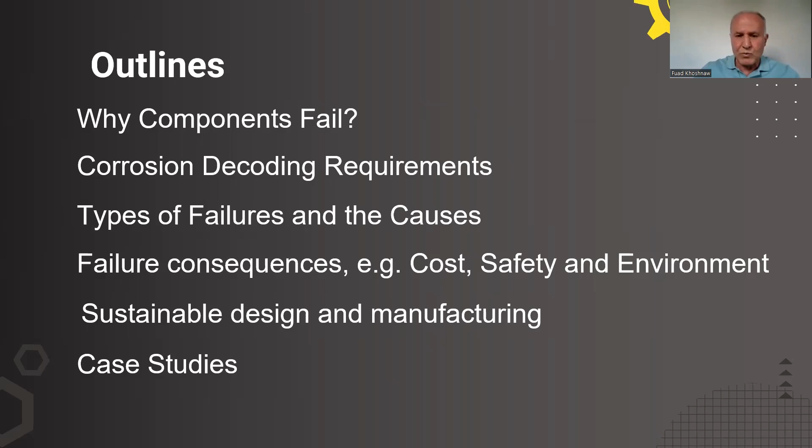Okay, so why do components fail? Any idea why do components fail? Maybe you should come here and speak. Improper design. Yeah. Material selection. Yeah, very good. Yes. Operation conditions is mentioned here. Yes, very good. All correct.

Yeah, that's good. So what you said, all correct. In simple way, if you try to give a first step to know why components fail, in any application for any material, there is something called applied, and on the other side there is a strength of that material or that system.

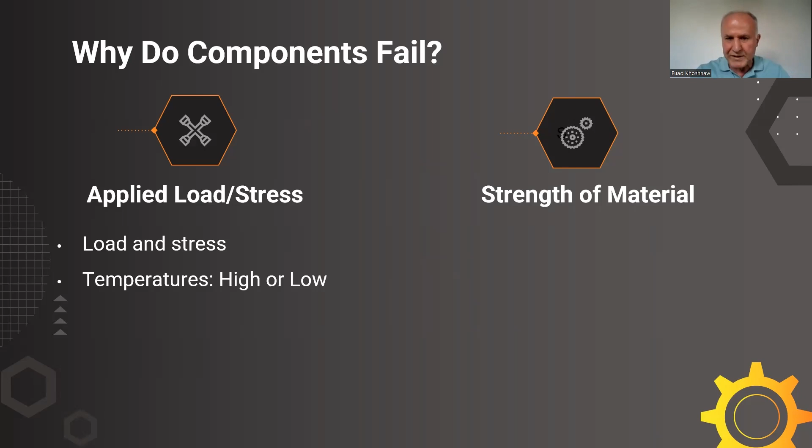This can be anything about applied, not necessarily only load, can be different things. The load doesn't mean mechanical force, it can be any other external action coming, including load or stress. So it can be applied load or stress, can be temperature, high or low. So it's not only about high temperature, low temperature also, sometimes when it is very low, causes some problems.

I will give an example about this later. Environment, when it is aggressive environment with high concentration or radiation - so all these are somehow actions will be applied on the material. And when it is out of the limit that the material can resist, then that's one of the main reasons why the components fail.

Of course, operational material selection, all coming through this as well, as we said. But on the other hand, there is a strength of that material. And when we say strength, it can be strength like yield strength, fatigue strength, creep strength, etc. All these mechanical strengths, and also toughness.

Toughness is a measurement for impact or for crack propagation in fatigue. Hardness, when the material is soft and is in contact with another material, then there is no enough strength of that. And then corrosion also - corrosion has also some measurement, which material has high corrosion resistance.

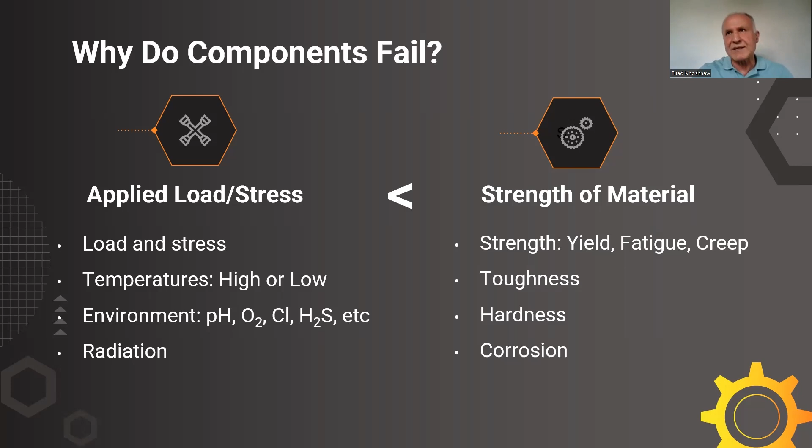So let's agree on that in the very simple way. Why components fail? Because the strength of that material that is used, any type of strength in general, is lower than the applied stress or the applied actions, let's say. Okay, now with this definition, the statement about why components fail, we can somehow say what are the types of failures and the causes behind.

That's slowly we go in deep and deeper with the slides. So for those that are not very much familiar with some mechanical failures or tests, when we say fatigue, that means cyclic stress. So it is not static, it is cyclic. And cyclic, we mean the applied stress, the amount, the magnitude or direction, or both, changing with time.

So sometimes in tension, sometimes in compression, with time changing. And the amount, the magnitude of the stress is also changing with time. If that's the case, then this component is subject to fatigue. But the question is whether it will fail or not.

We go back to the previous slide. Is the fatigue strength of the material higher than the applied stress? If it is higher, then most likely it will not fail, or at least it will last as expected for the lifetime of the material.

Creep or oxidation - creep is another type of mechanical failure. When there is a stress, so stress means there is a mechanical force on it, with high temperature, that's creep. But for oxidation, it doesn't need to be under stress, it can be just only temperature. And when we say high temperature, it is somehow related to the melting point of the material.

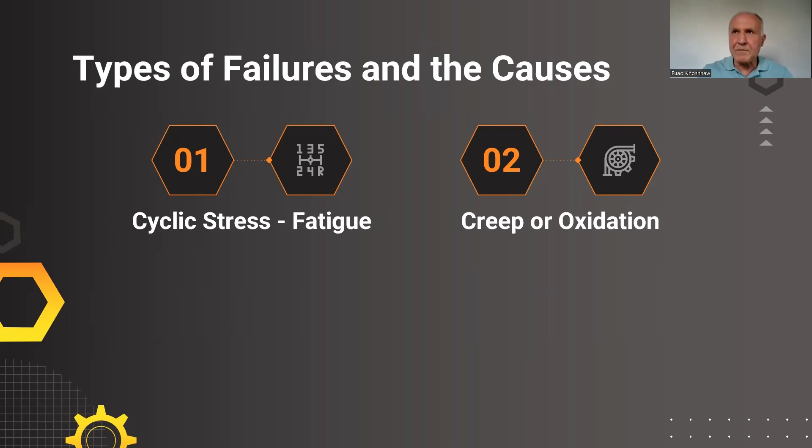And in general, it is not a fixed term, but in general, if the applied temperature with stress is around 0.5, half of the melting point, then at that time we need to consider the creep failure. So if the material has a melting point, let's say 1000 degrees centigrade, then 400, 500 is high temperature.

Corrosion fatigue happens when there is fatigue and corrosion together. This is a type of stress corrosion. Stress corrosion occurs with static load, when the stress is static for a long time, not changing in magnitude, value, or direction. If it is changing, that's corrosion fatigue. But if it's not changing that often, then it's stress corrosion cracking. So it's a combination of corrosion and stress.

Sometimes creep and fatigue happen together, where the component is under cyclic load but at high temperature. For example, turbines, boilers, and heat exchangers - over time, pressure causes stress on the tubes and walls. When it works in the morning and not in the evening, and even during working hours the stress goes up and down, that's fatigue. And if it's at high temperature, around half the melting point, then creep also has an action on that.

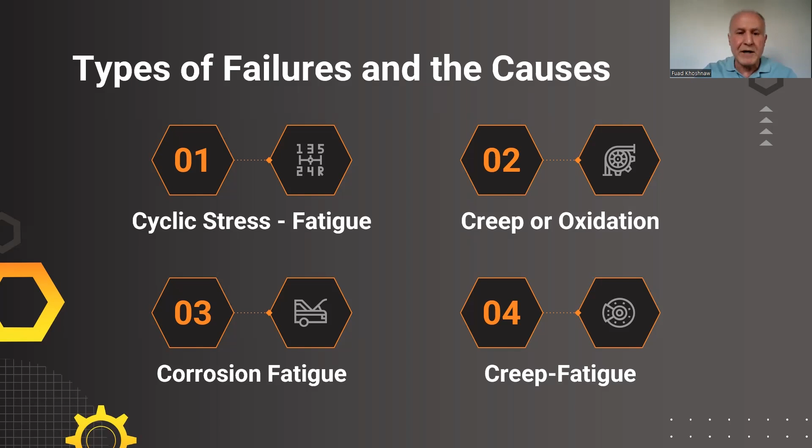Okay, any questions so far? Is everything clear? Yeah, yeah.

To understand how we can diagnose any type of failure and solve it, we need some information, some background - not necessarily very deep, but helpful to understand what type of failure it is. In some details, maybe not everyone is familiar, but if you are, you can pass on it; if it's the first time you're seeing this, I'm just saying it will be helpful if you go back and familiarize yourself with these details - it will help in the future for any research on corrosion you might need to do.

These are things linked with corrosion or any type of failure, not necessarily corrosion. First, we need to understand the material - what type of material it is in different ways: the chemical composition, the microstructure, what heat treatments were done before or after, what surface treatment was done, and whether there's any welding in the component. Other things can also be linked with the type of material, such as whether it's bonded or in contact with other materials. So it's all about the material - we need enough information about it to understand what's going on if it failed.

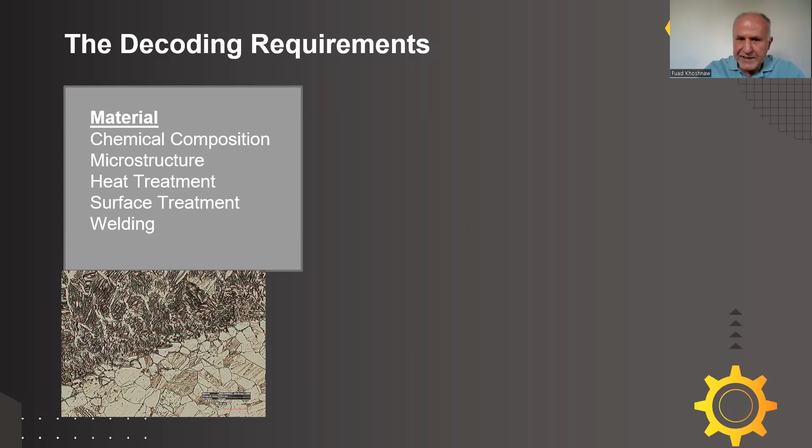So that's one about material. Another one we need to know, as one of the colleagues mentioned, is the operational conditions of that component. Is it under stress, what type of stress, cyclic or static, or sometimes residual stress? You see there is no stress on it, but because of previous manufacturing processes or heat treatments, there is enough residual stress inside the material. This causes big problems if it is not released before the component is installed in the industry.

So always it is necessary to make sure the material used is free from residual stresses. Also, it's important to know if it is under tension or compression, and what type of strain rate - is it slow strain or sudden load, impact? The material behaves differently when under slow tension versus impact tension, and the same with compression. So these details need to be known, similar to the type of material.

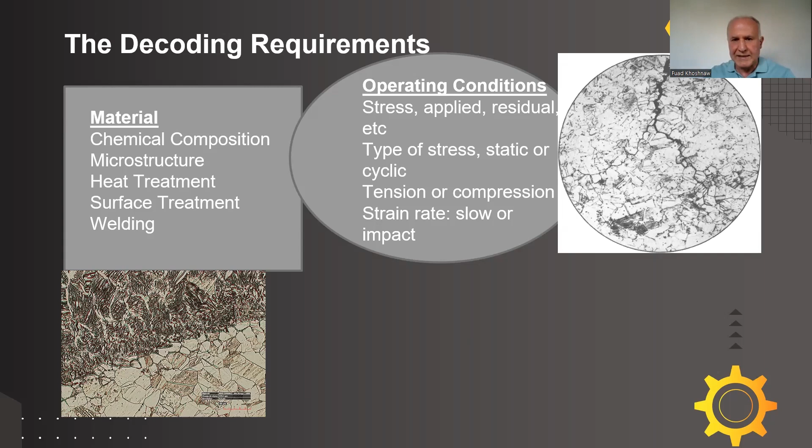Then we know the third one is the environment - chemical composition of the environment, not of the material, the temperature, pH, if there is a liquid going, what's the flow rate, is there any radiation? Anything about the environment. So this is like a puzzle - we need to put these together to understand what is going on, to diagnose and to avoid anything similar.

When we connect these things - type of material, operations, environment - that will give us a first hint of what's going on. Maybe we still need more investigation in the lab, but in theory, when this data is available, we can at least direct ourselves to which lab tests we need to go. So this is about the requirements we need to know.

I'm trying in the next few slides to focus on some of this material stress in more detail. So what do you mean by microstructure, for example? How does microstructure relate to, if you understand the microstructure that's coming from the manufacturing, or from heat treatments, or from welding, for example.

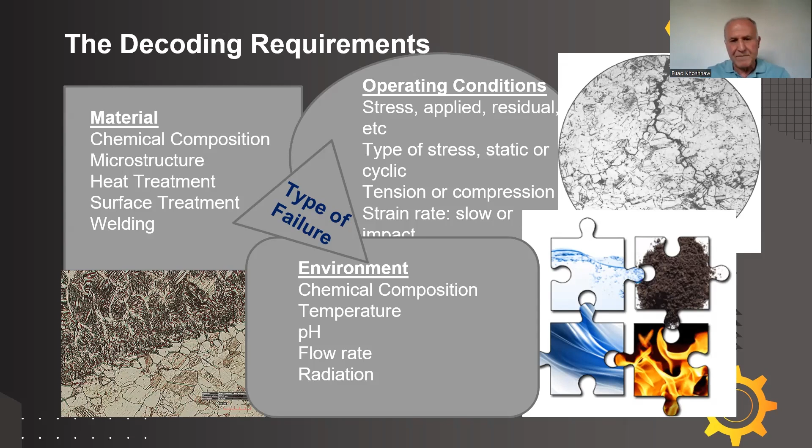I assume most of you are familiar with this diagram, which is the Fe-carbon diagram for steel. This is the first step of understanding heat treatments and phase transformation of materials. I'm not going in deep with that, but what I wanted to show is how the microstructure and the chemical compositions can be linked together. This is just a simple example, and there are many other examples.

As you know, steel is pearlite at room temperature - pearlite, which is ferrite and cementite. So this area is pearlite. I'm talking about steel, and in this area, which is below the eutectoid, the chemical compositions change the microstructure. If you change steel to stainless steel, how does this happen, and what's going on in the phase diagram?

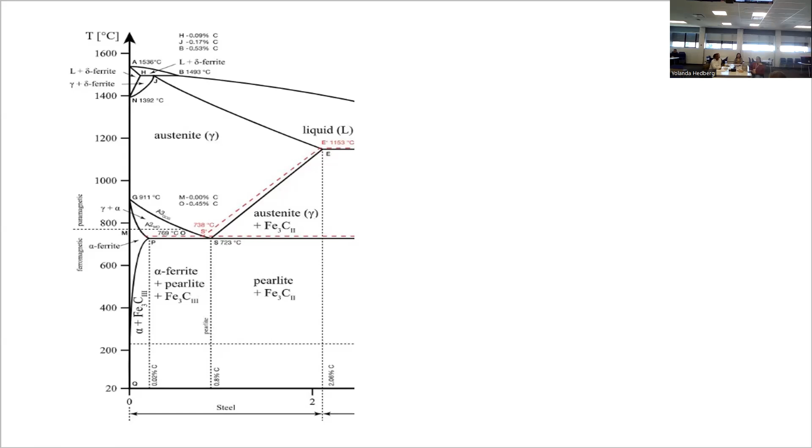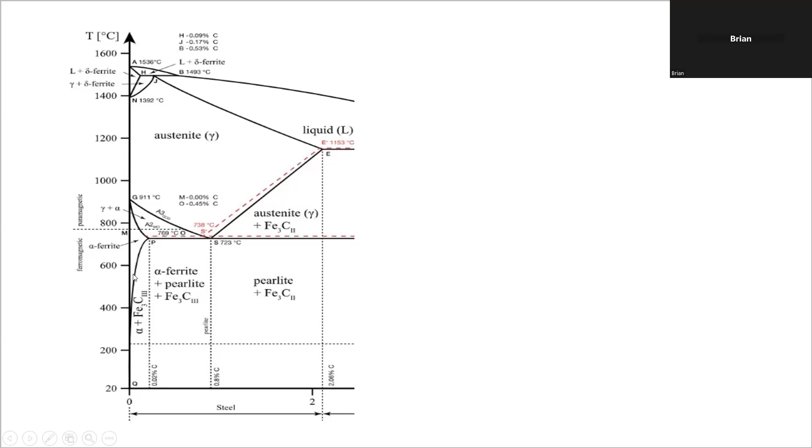So nickel stabilizes austenite, and chromium stabilizes ferrite. It doesn't mean chromium changes ferrite into austenite - only nickel stabilizes austenite, while chromium stabilizes ferrite. That's correct.

So let's imagine this loop of alpha ferrite. If we add chromium, that makes this gamma loop smaller, much smaller. And the whole ferrite region has become very large, this small triangle has covered everything at room temperature, alpha, with 10, 20, 30 percent chromium.

From 20 percent chromium, sigma phases appear, which are not welcome in corrosion, because this sigma is different than alpha as a microstructure, so again galvanic action is coming in.

So this is the phase diagram of iron and chromium, by adding chromium or equivalent. It is not only chromium - there are other elements acting similar to chromium. We will see that now.

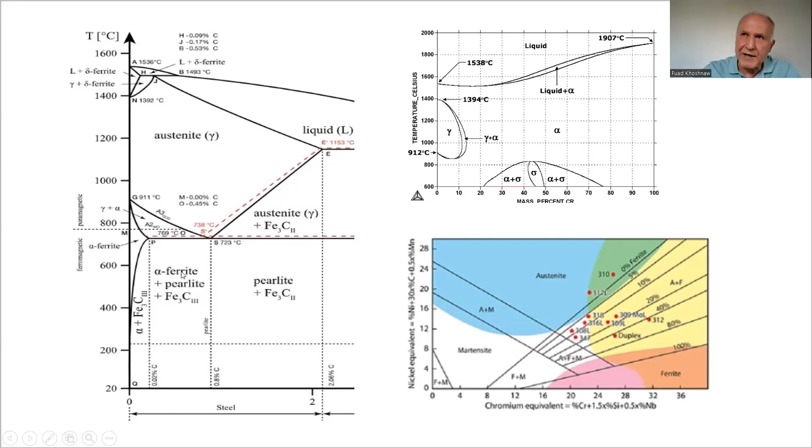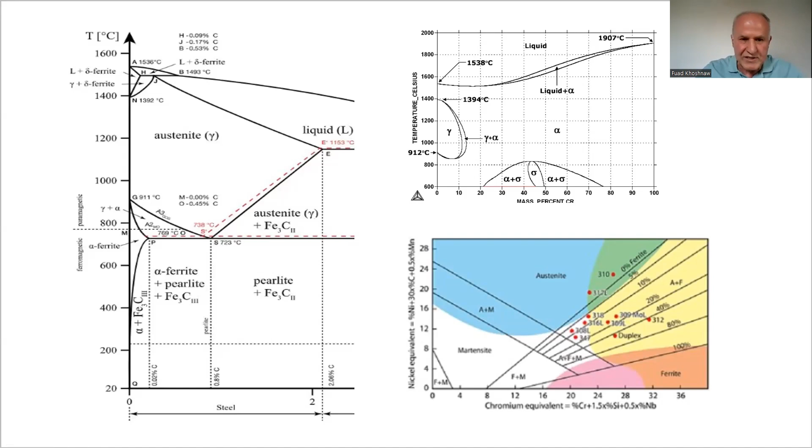Why are we saying that? Because when we have two different phases, austenite and ferrite, same as ferrite and cementite, this cementite acts as cathode compared to ferrite. So there will be a galvanic action in every grain, and that somehow causes pitting, and at the end causes general corrosion on steel.

This is about microstructure, just an example to go a bit deeper with the microstructure and chemical composition. We do a similar thing now about stress - how we understand stress, and if we go one step deeper than the normal calculation, we need to link the equations we use in stress calculation or stress analysis with how that affects inside the material, considering the microstructure of the material.

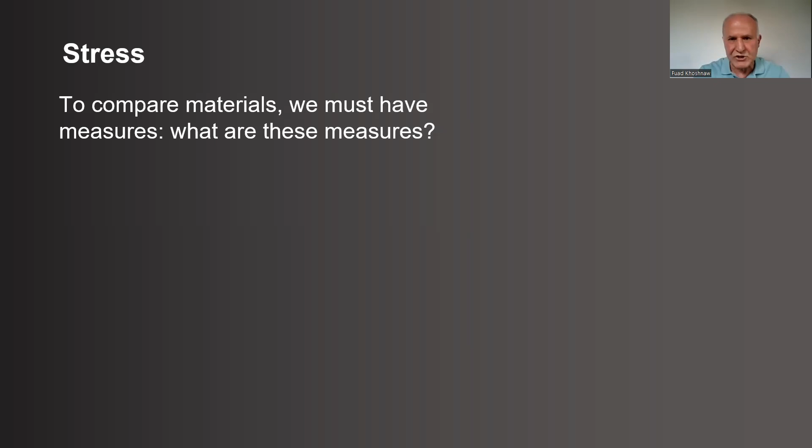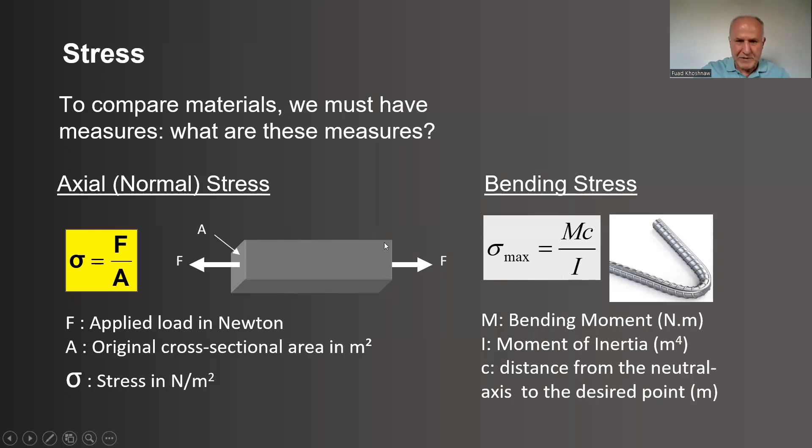How is that? Because usually as mechanical engineers, what we do is we consider the applied stress as flat - something like that. We say force over area, which area? This flat cross-sectional area, the perpendicular one. But in reality, it is not like that.

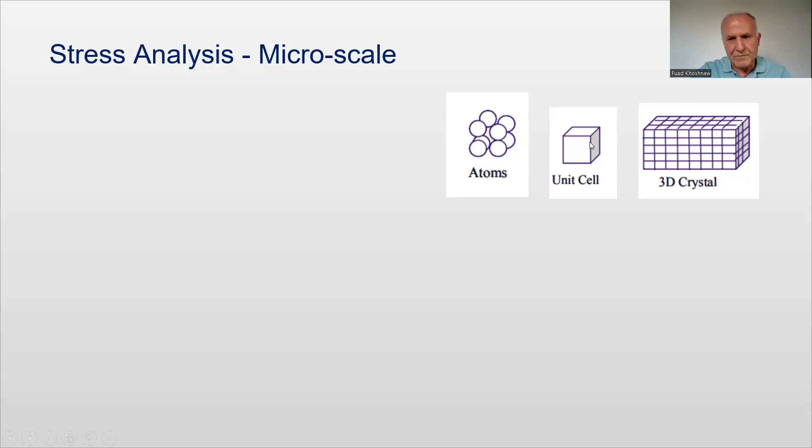In reality, we know this story - atoms form a unit cell for metals, then this unit cell is repeated in 3 dimensions to make a grain or crystal. This crystal solidifies during solidification in different directions - this grain solidified in this direction, but this grain solidified in another direction, and this one in yet another direction. So we need to consider them. Imagine the previous slide - this is the force applied on this cross-sectional area, but this cross-sectional area has 2 faces, this face and this face.

And the stress on this face, the normal stress coming from this force, if we analyze it, that will be F cosine theta, and this will be F sine theta. But the main point I want to highlight here is the forces on this surface are not equal. It depends on the angle of atomic plane orientation.

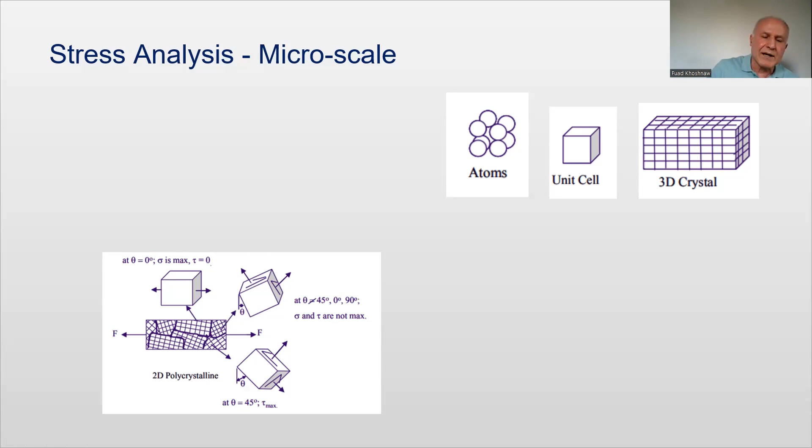So this is something, if we go into deep investigation, these can be found with transmission electron microscope or other advanced methods, we can find out what is the exact amount of stress applied, what's the highest amount of stress. So considering these details in analyzing stress on components helps identify the weakest points in the system, meaning the component, especially where there is a stress concentration factor.

So if this one is a plain bar, plain like that, with no discontinuity, then it is acceptable to do this calculation. But if it is like that, large diameter to small diameter, then we cannot go through any normal equations to calculate the applied stress here.

There is something called KT, stress concentration factor. To find out the value of KT, there are charts, so many charts for each load, for each type of component. Is it a plate? Is it a shaft? Is it under loading of bending, torsion, or axial? For each of these, there is one chart.

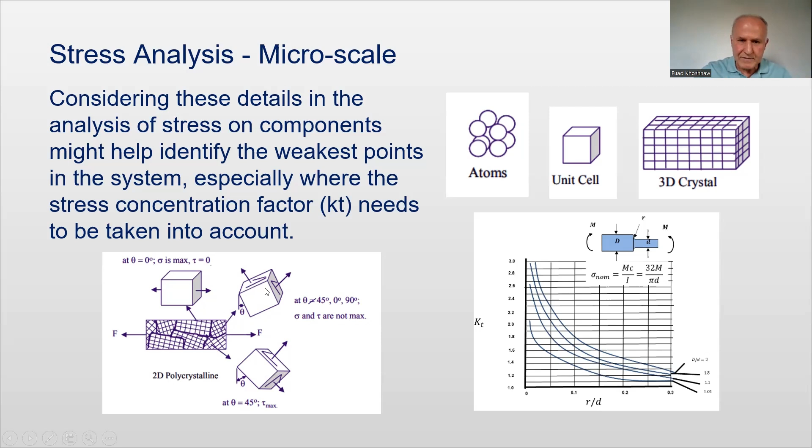The crack will grow and lead to failure. So finding the weakest point and why it is the weakest point is the main step we need to find out to avoid failure at the end. So I try to make a link between the microstructure, or especially the unit cell, and fatigue.

Fatigue is why I focus a lot on fatigue, because fatigue is everywhere. It is very rare to find a component under static load. Even after 1 or 2 years, the load will be changing. Even the mountains and the atmospheric pressure, the stress on them will be changing. So fatigue is everywhere, but it depends what is the frequency - every second, every minute, etc.

So to understand fatigue, it is cyclic stress, and this can be axial fatigue, or bending fatigue, or torsion fatigue. So there are different types of loading, and these different types of loading can be cyclic - bending can be cyclic, the axial can be cyclic, torsion can be cyclic, any type.

In brief, that's the stress and strain diagram, in longitudinal or static load. That's how it works, this typical yield stress and ultimate. But in fatigue, that's going back to zero many times, and even the applied stress is under yield strength, but probably after some 1,000 or 100,000 cycles, the material will fail.

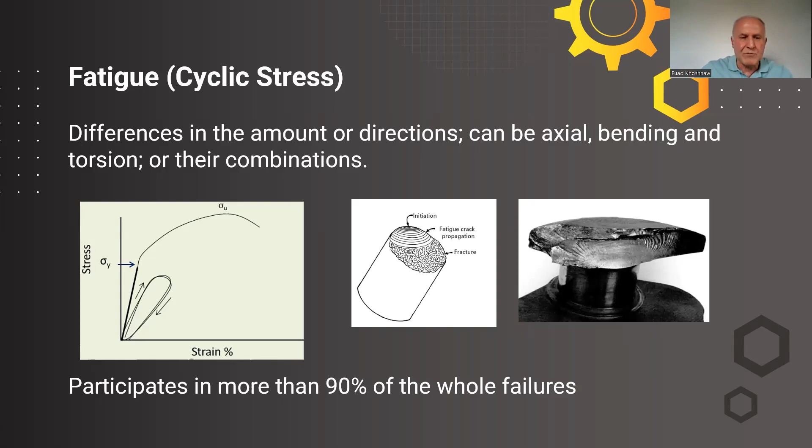So it is with corrosion or at high temperature. It might be corrosion is the main thing, or creep is the main thing, but also sometimes in many ways, fatigue is the main factor for failure.

So coming back to this one, imagine there is a force that causes bending, and there is a rotation, so that's also torsion - different types of loading going on. And as we said, these are all unit cells, grains. Each grain has a huge number of unit cells, and these unit cells are sitting in different orientation angles. So what's going on? Let's start with this one.

If you apply load here, this side, because it is bending, one side is tension and this side is compression. The lower layer is compression, it will be shortened, and the higher layer is tension, so it will be longer during applied load. While this load is loading at the moment, this point is under tension.

When it is rotating, going to number 2, this unit cell was here, has become number 2. In bending calculation, this is the center of the cross section. So all the unit cells along this line, the stress is 0.

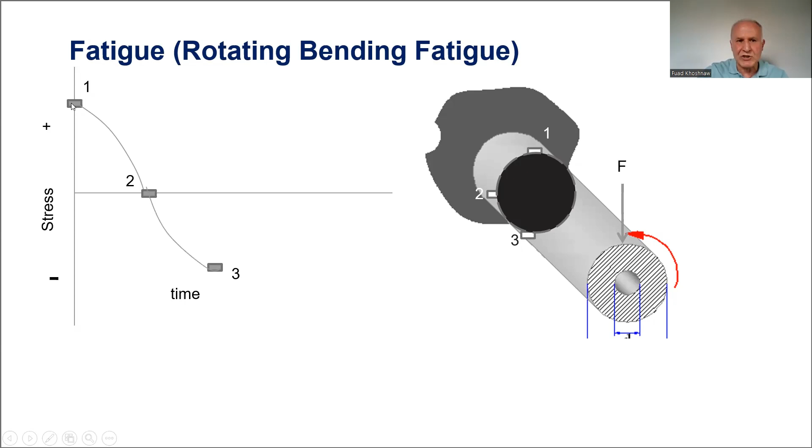And when it becomes the lower layer, number 3, the direction of the stress is changed from tension to compression. So this is the same unit cell from 1 that has become, down below, compression. Then going to number 4, it becomes 0 and then comes back. So in one cycle, this unit cell has gone from maximum tension to 0, to maximum compression, to 0, and will be repeated.

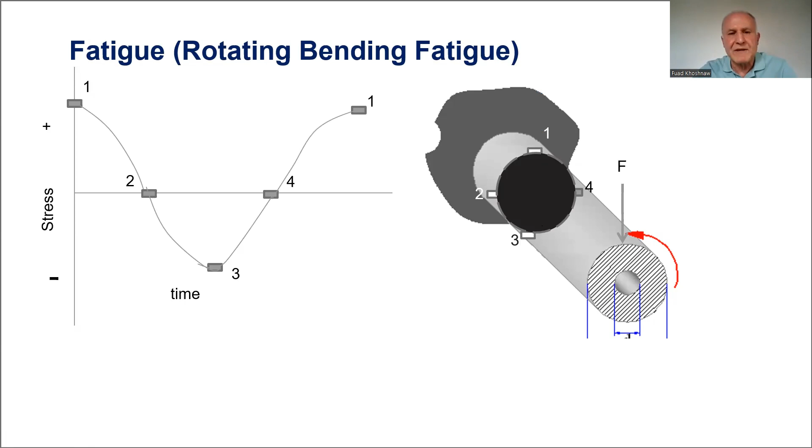So imagine if this is a shaft of a motor, and this motor runs at 3000 RPM, that means this unit cell is repeated, exposed to tension and compression 3,000 times, going up and down. This going up and down, tension, compression, causes cracks, causes pits if it is high stress.

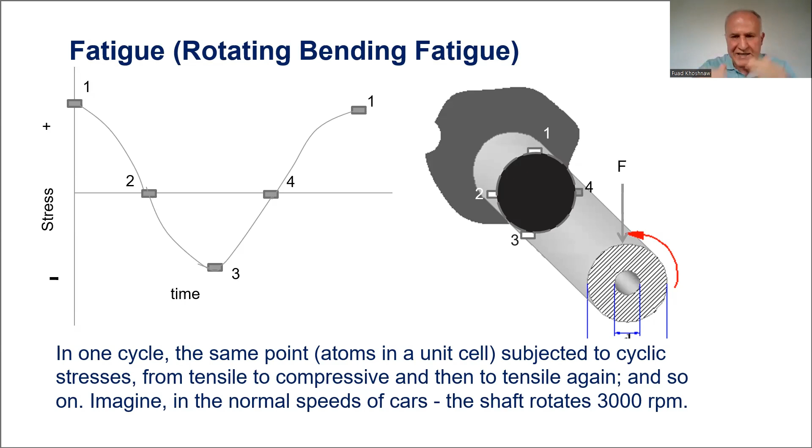Atoms in the unit cell are subject to cyclic tensile and compressive stress so many times, this causes the crack. So we understand now, inside the material, when the stress is going up on the material, if it is cyclic, how the atomic planes and the unit cell respond based on the orientation and also on the cyclic load. Any questions so far?

Online? No? Okay, good. Good, yeah.

So creep, as we said, temperature is the main parameter for creep. But when we say temperature, we need to know in parallel what's the melting point of that material, because 200 may be high for one material but very low for another, depending on the melting point.

So creep can happen with turbine blades, chemical plants, anything with engine components, whatever engine it is. Most likely stress will be there, and the source of the stress can be mechanical force or gas pressure, fluid pressure, which causes stress.

Also, maybe there is a fluid inside, even at high temperature, this causes some corrosive environment. And as we said, most likely the stress will be cyclic. Very rarely you find something always under the same constant condition.

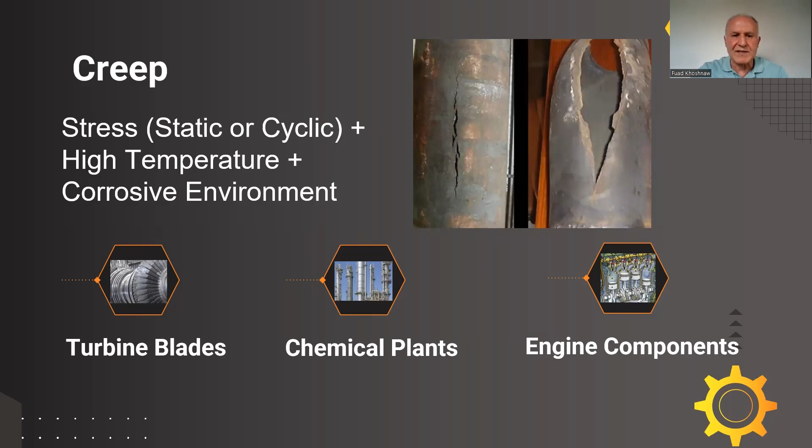Okay, now coming to the main point about corrosion. Why did I mention these in previous slides? Because corrosion is not separated from these types of failure. It might be the first main reason for failure, but there are also other reasons with some contribution, maybe 30%, 40% with corrosion, such as fatigue or even high temperature.

So I believe we are familiar with the types of corrosion. We won't go through each of them in detail - we'll select a few of them to go a bit deeper, because others may not be very common. It's happening, but not that much common in industry.

So general corrosion - there's no material with zero corrosion rate. Every material, even platinum and gold, corrodes at some rate, but very low. It is always there, there is corrosion.

With pitting, this usually happens when there is a passive layer. The layer cracks, and the ions, whatever ions they are, for example chloride ions, attack the surface and go inside to make the pit larger inside, even if you don't see it on the surface. Mostly aluminum and stainless steel have this oxide thin passive layer on the surface, but some ions can attack the surface and make cracks or scratches, allowing other ions to go inside and cause eroding or corrosion inside the material.

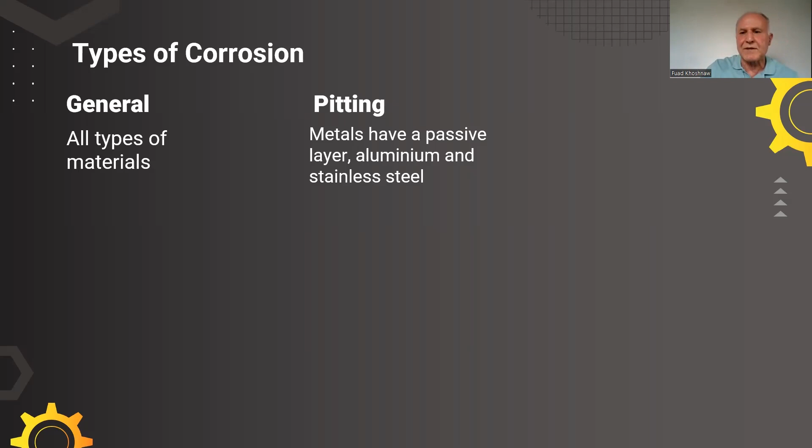Stress corrosion cracking, as the name says, is stress and corrosion. And this can be static - at that time we call it stress corrosion cracking - or it can be cyclic, we call it corrosion fatigue.

Intergranular corrosion - we'll go deeper with that in the next slides. That's somehow correlating between microstructure, specific microstructure, when it goes through different heat treatments or welding at high temperature, causing changes in the phase transformation and the microstructure. So it's not the same as received before. Change happens, and this change causes corrosion.

Galvanic corrosion, a very popular one, happens when two materials are in contact in a wet environment. Embrittlement - some environments, some solutions cause embrittlement in some materials. So steel is one of them.

Embrittlement can come from cold temperature, very cold, minus 50, 40, especially for steel. That causes embrittlement, and that causes big problems in some applications - we'll talk about this later. And it comes from some, for example, hydrogen embrittlement or sulfur.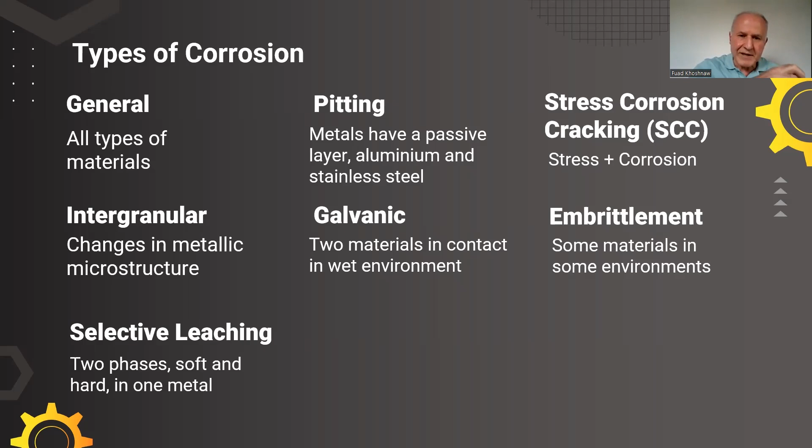Selective leaching, when two phases exist, one soft and one hard - so for example, as we said in the beginning, one phase is ferrite and another is cementite. Cementite is hard, ferrite is soft. And if there is fluid flowing inside, this causes the ferrite spots or grains to erode easier than the hard one. So this different rate of corrosion in the same component causes some big pits or large pits on the surface.

Erosion - that happens when there is a fast flow of fluids going inside tubes, in cylinders, causing damage that is somehow mechanical action combined with chemical action.

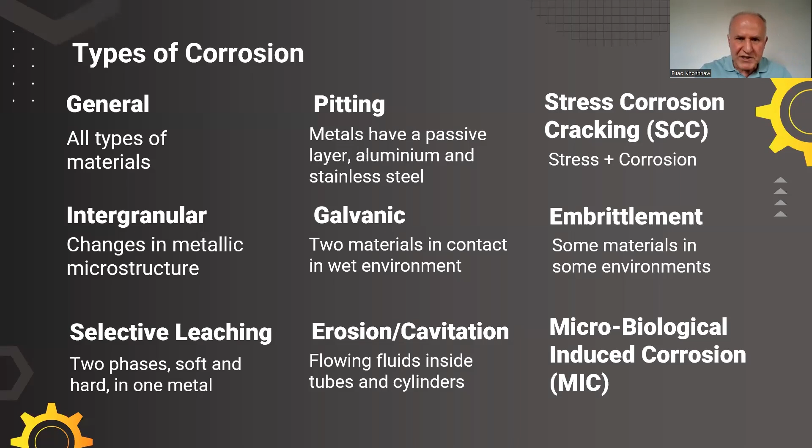Microbiologically induced corrosion occurs when bacteria cause deterioration of some elements, mainly involving sulfide, which at the end increases the acidity of the solution and increases the corrosion rate. So in the next few slides we try to see each one in more detail to find out how we can avoid it and what the reasons behind it are.

This is general corrosion, which is mainly rust. For prevention, we can use painting or sacrificial corrosion, sacrificial anode, by linking another material with it, which somehow will help.

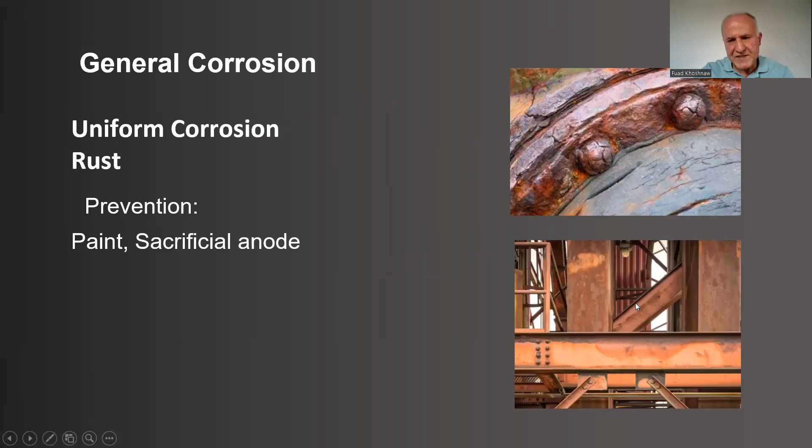What about this one? Is it corrosion, or something else? The bottom picture, the second one, is that corrosion or a type of steel that looks like this? This type of steel looks like it is rusting, but it is called weathering steel, and it looks like this.

It has another name also, it's called COR-TEN, or in long form, high strength low alloy steel. It includes some elements such as manganese and copper, mainly copper, and chromium, but low, not like high chromium or high nickel steels. It's about 1 or 2% of these elements.

This causes a layer to form on the surface. It looks like rusting, but it is not. It is preventing corrosion. There are many constructions using it, and although the appearance is not very desirable, it can be considered a cheap solution to prevent corrosion in wet environments.

The advantage is that with time, this oxide layer that forms protects even more as time goes on, preventing corrosion. We need to make a clear difference between rust and this type of steel alloy, which already has resistance to corrosion, even though the appearance is somehow similar. It is a natural brown oxide layer, but there are no cracks or flakes as seen in actual rust. It just looks a bit smooth, a rough surface, but compared with rust there are no flakes, so you can tell the difference.

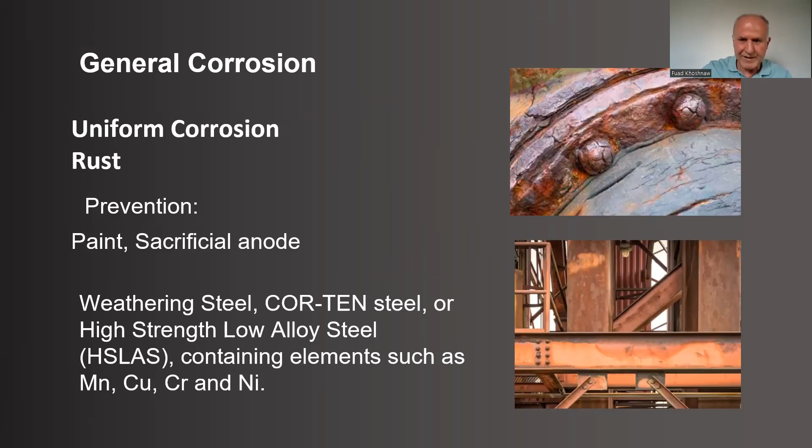Some companies or countries use this, especially outside cities, because as we said the appearance is not that attractive, but it is cheap compared to, for example, cladding with stainless steel, where the chromium and nickel content is much higher than this type of steel. But it lasts a long time, because with time this protective layer becomes stronger and thicker, so it remains effective.

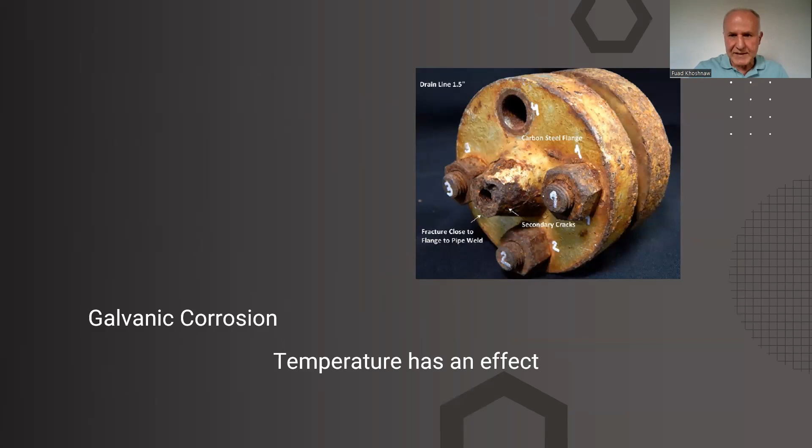Galvanic corrosion happens when two materials are in contact. In basic principle, corrosion happens when we have an anode and a cathode. This part is not corroding, and this one is corroding, so this is the anode and this one is the cathode, at the bolt itself. This is galvanic corrosion, and this one is galvanic but also general corrosion as well, because the bolts are different materials. The bolt is more corroding, so that material is the anode compared with this one, which is the cathode.

Temperature also has an effect. If it goes to high temperature, that causes creep at that time, or oxidation if it is high. This is again from one of the cases in the book I mentioned, and more details of that case study can be seen in the book.

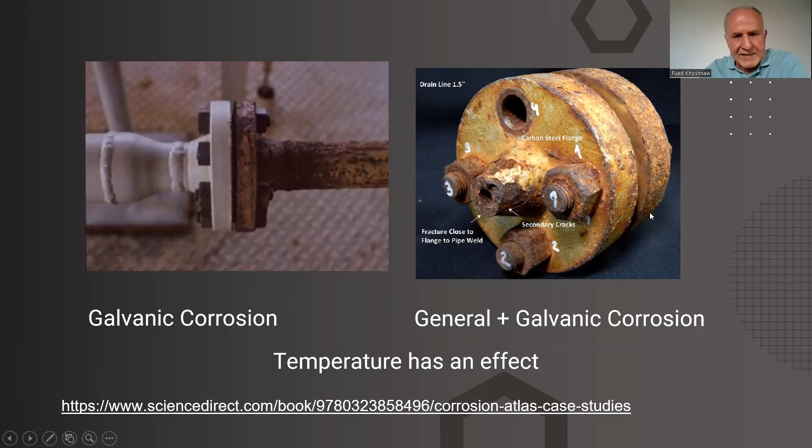In a simple way, I'm sure you are all familiar with this, how to avoid galvanic corrosion. This is the EMF series for the elements. Usually the element at the top is cathodic, and the one going down is anodic. To avoid galvanic corrosion, we need to choose two materials that are not far from each other in this series, because the delta E, the voltage potential difference between them, if high, makes the force pushing electrons from anode to cathode high, and the corrosion rate will be high. When the materials are close to each other in this diagram, the potential difference is low, and the corrosion rate might become low as well. So a simple way to avoid galvanic corrosion is to avoid metals that are far apart.

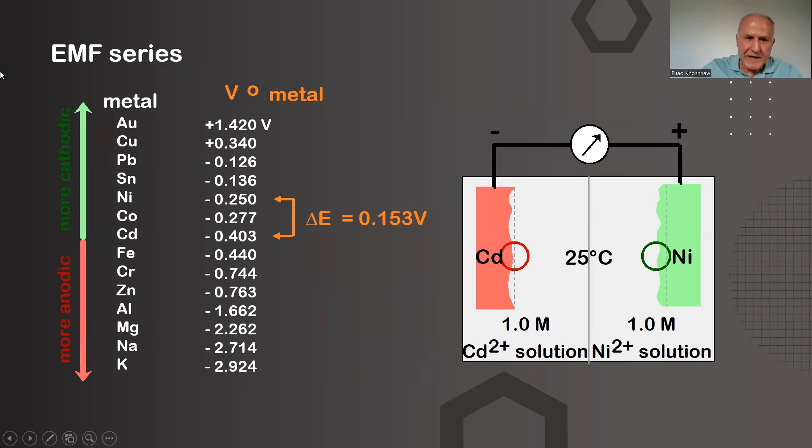But we said if it is as it is, without any painting or isolation, we are talking about area effect. It's important for this one to not be far from each other. This is one step, and another step to avoid large cathode. That's a good step really, because usually, not always, cathodes are more expensive, so we need a smaller cathode to prevent corrosion.

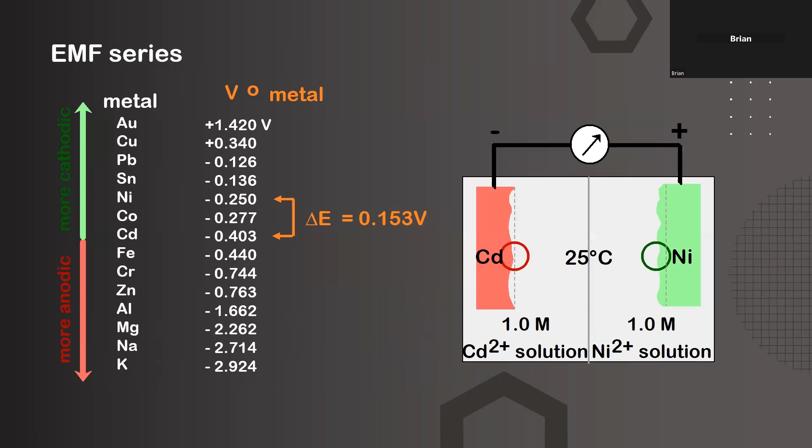I have a follow-up question. So for the previous slides, how come on the diagram on the right you have steel? My bad, for the next slide. You have cathode as steel, and zinc as anode, and that seems like a better option than having tin above the steel, where we have a pit inside the steel. Well, there should be no porosity or defects on the surface. Considering that the coating has no defects, this will be correct.

But when a pit happens, this will be another story. We are going to another step of investigation after pits, cracks, or scratches happen on the surface.

Yeah, this is called anodic protection, and it's not a good idea when you have this one anodic. You do have that quite often indoors, when you have tinned things for indoor environments, or silver coatings on something like steel. It's not a good idea if you get defects in it.

The difference between these two is both of them at the moment. Well, the question is about both of them exposed to the same solution at the same time. But here it is not, so this one is protected, the steel is not exposed to the air. So this example cannot be applied here when there are no cracks or defects on the zinc surface. Maybe this is a bit confusing if we consider these two together.

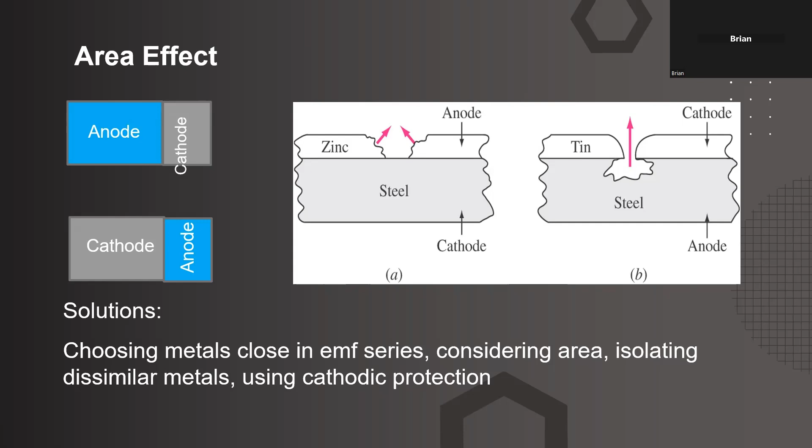So then do you prefer zinc coating or tin coating? It depends on the environment, indoor or outdoor. Depends on the environment. For example, the advantage of this one is protecting steel very well. That's good.

But the danger, the risk here, is if there is any scratch, then the steel, even in a very small area, will be susceptible to air. So this will be completely anode, and a small anode with a big area of cathode causes very fast corrosion.

So somehow, let's say this one will be similar to after the crack or scratch happens. The anode is small here, still small, but because the hole is small, the anode, this small area, sends electrons to all the surface, so very fast corrosion of steel happens.

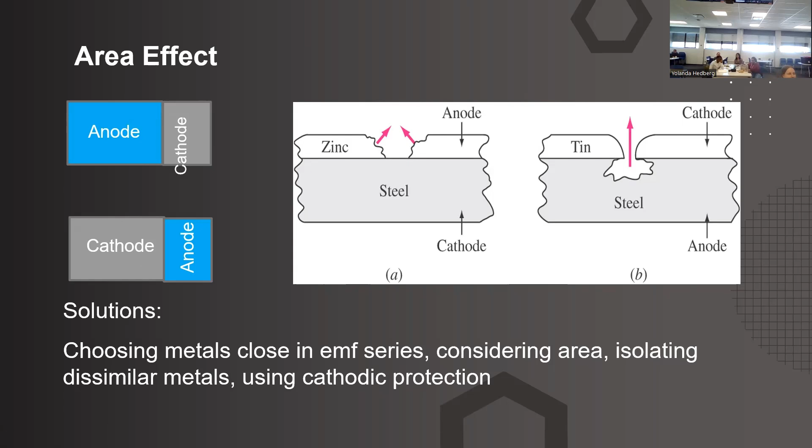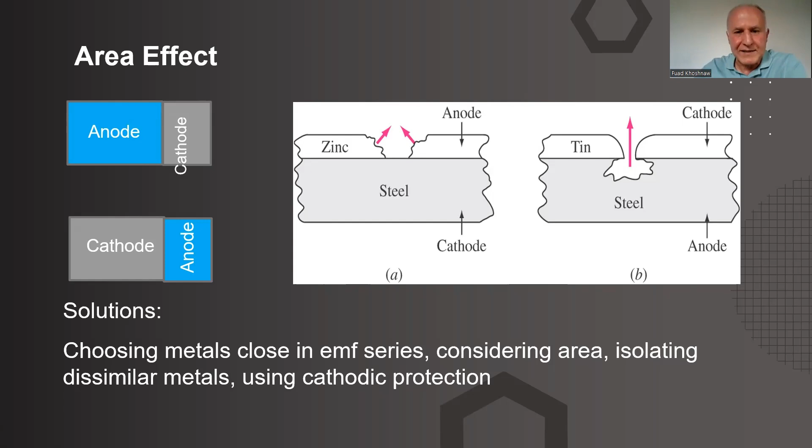I spent some time on this. So, pitting corrosion, that's a very common test in general, to give a behavior of the material about corrosion.

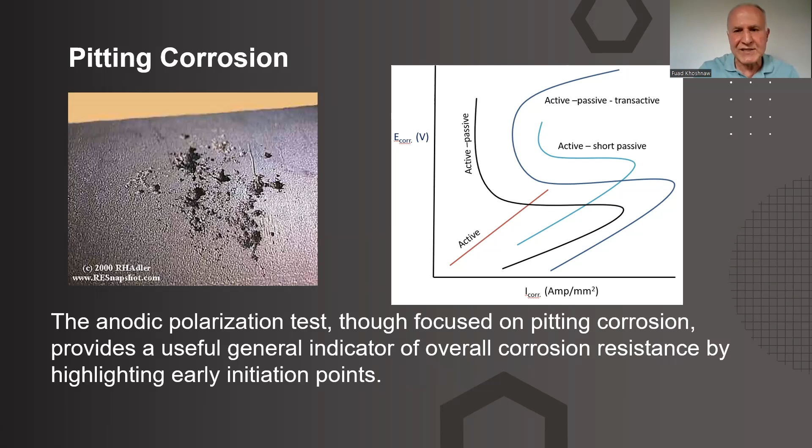I assume you are familiar with this. Some materials are always active. Some of them are active, then change to passive. Another material in some other solutions will be active, passive, then transactive. This gives some indications about the resistance of the material.

Intergranular corrosion, I need to go fast. This happens in some materials only, for example austenitic stainless steel, especially 304, and in some aluminum alloys as well. Austenitic stainless steel is one phase, a good homogeneous microstructure. But when it goes through sensitization temperature, from 550 to 850, it depends from one reference to another.

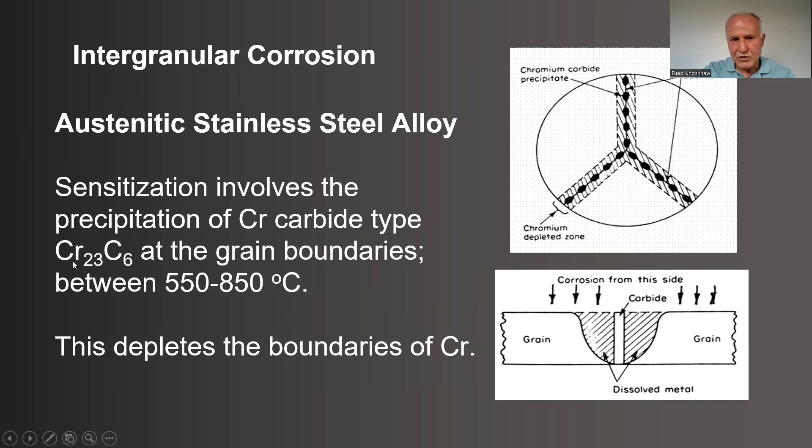If the material passes through this range of temperature, chromium carbide precipitation happens. This chromium comes from inside the grains, from the grains coming onto the grain boundaries. So the chromium content inside the grains will be less than before, because it has been segregated here as a chromium-depleted area. Some places will be depleted by chromium, some not.

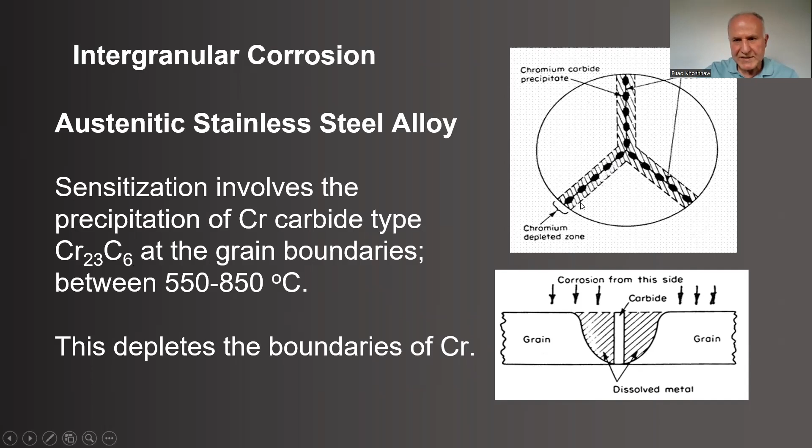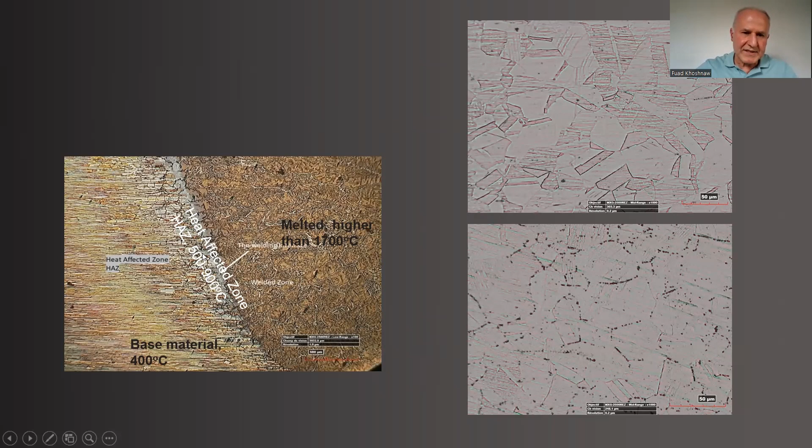And this also causes one type of galvanic effect. This somehow happens in the heat affected zone in the welding area, because this is molten, so this is base material, but the heat affected zone passes through this temperature, the sensitization range, and this chromium carbide happens.

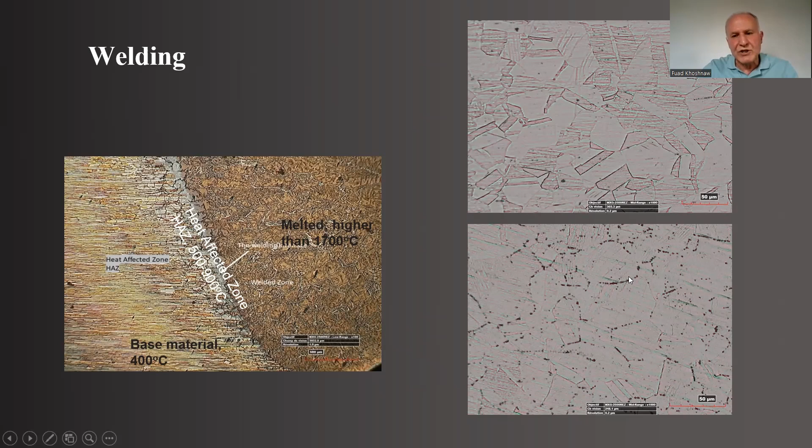So this is before, this is after, on the grain boundaries. Because the chromium has been depleted, when this is exposed to any solution, these areas will be more susceptible to pitting or general corrosion.

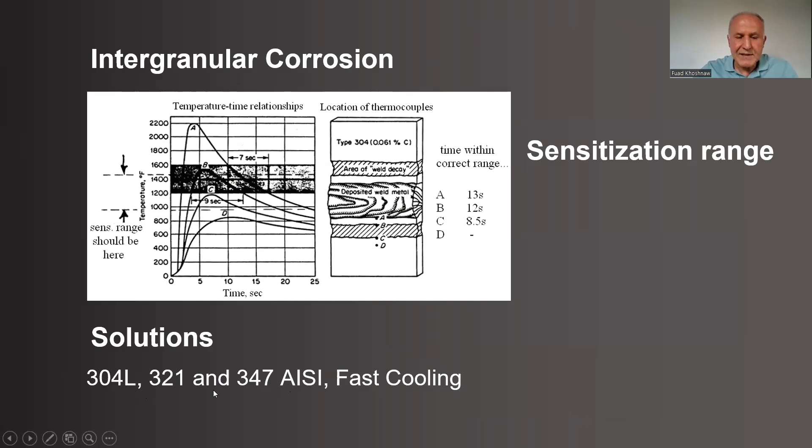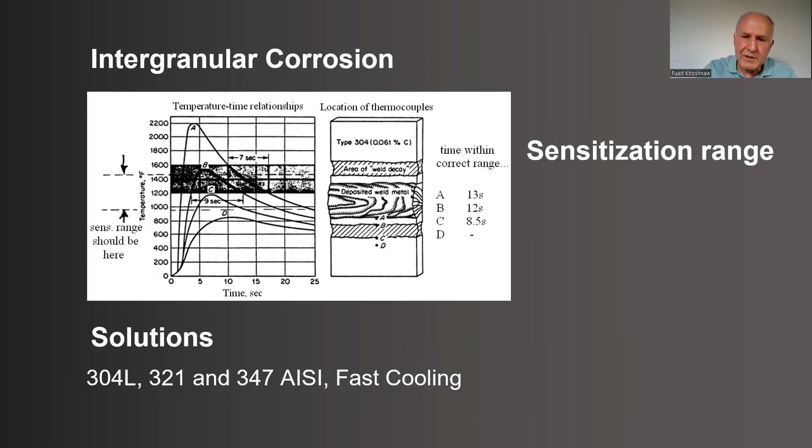So how to solve it? We can use low carbon or other types of austenitic stainless steel that have certain elements. For example, 321 has titanium, and this one has columbium. These have more affinity to combine with carbon than chromium does. So chromium will stay, and these elements will combine with carbon. This is somehow protection, or fast cooling, so you don't give time for this precipitation to happen.

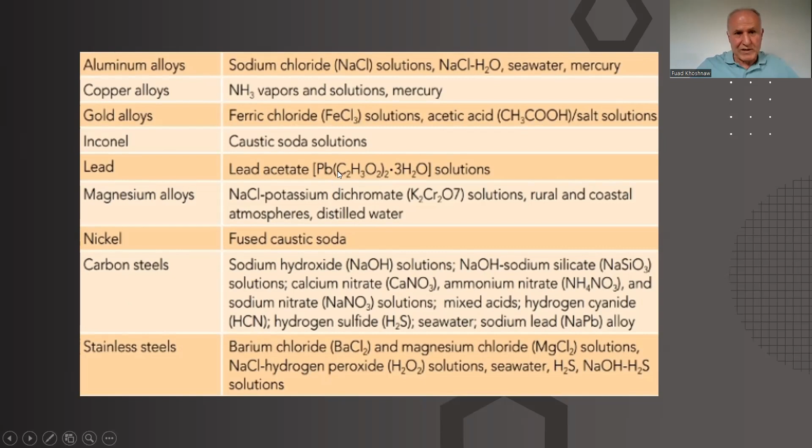This is a type of stress corrosion cracking. The main point to understand in stress corrosion cracking is that some alloys in some solutions cause cracking, not every material in every solution. So these materials are exposed to stress corrosion cracking in these solutions. Of course, there should be stress as well, not only chemical solution.

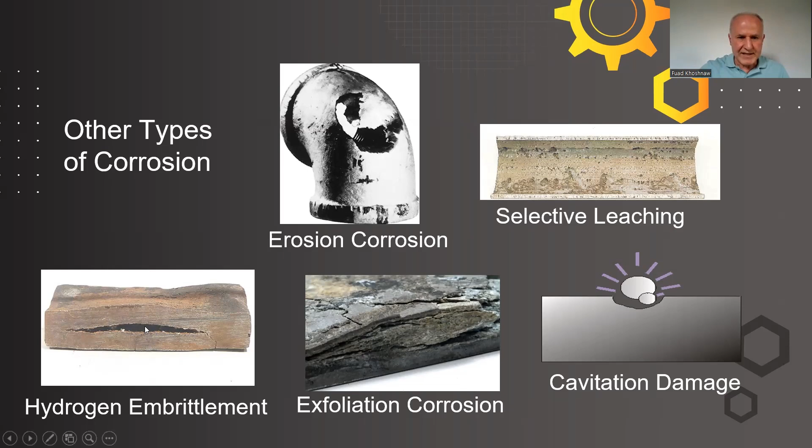And these are some other types quickly: erosion, selective leaching, exfoliation, which mainly happens in aluminum alloys. Hydrogen embrittlement is when hydrogen atoms combine together to make hydrogen gas, and this gas slowly becomes bigger and bigger, causing pressure on the sides and making these cracks large.

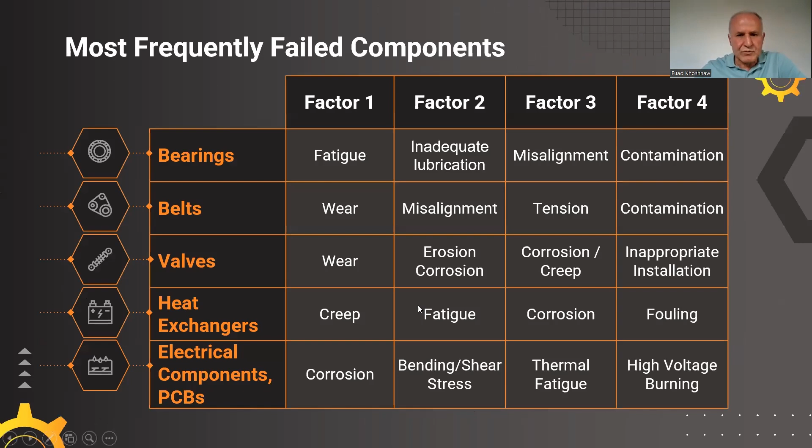This is about fatigue, but there's no time for that. So that was the quiz I prepared. You can look at it later.

So for example, how do we understand this? Two dissimilar metallic alloys - a mild steel plate and a larger piece of austenitic stainless steel were joined together in a lap joint using welding, intergranular, remember. This assembly was subject to an applied stress during service in an oil industry environment for one year, where it encountered issues related to pitting and cracking. So this one has so many possibilities of corrosion and other types of failure.

Two dissimilar metals means galvanic corrosion. Mild steel and a larger piece of austenitic stainless steel create an area effect of galvanic corrosion. There's welding, and it's subject to stress. So all these factors, and it's in oil - so many things we need to think about when information like this comes to us.

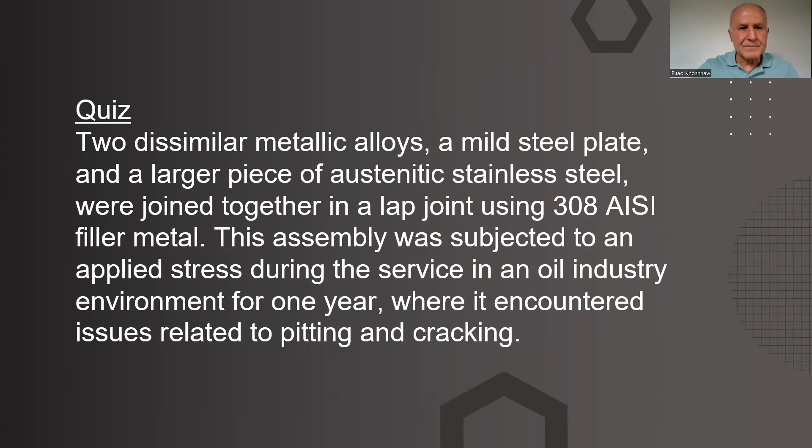I think I need to stop here. That was the last one. I had another part, but it seems there's no time for that. I was about to talk about the Titanic.

The main reason was embrittlement, because of the very low temperature, and the steel was not the right selection for very low temperature. So the material became very brittle, especially when it hit something - there was an impact load at very low temperature for the steel. This is in brief.

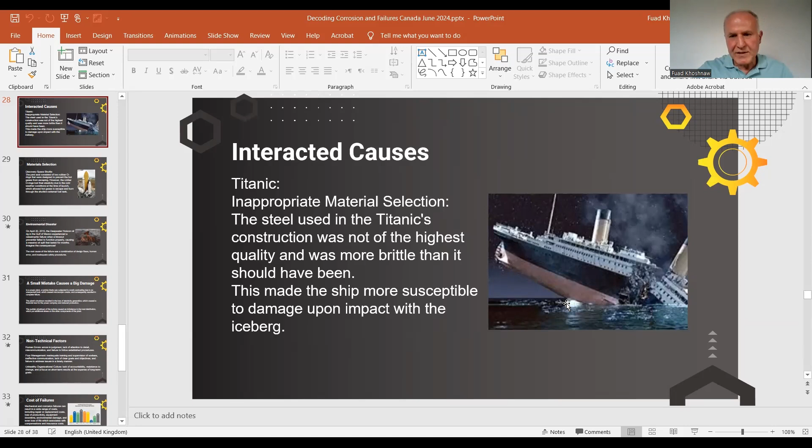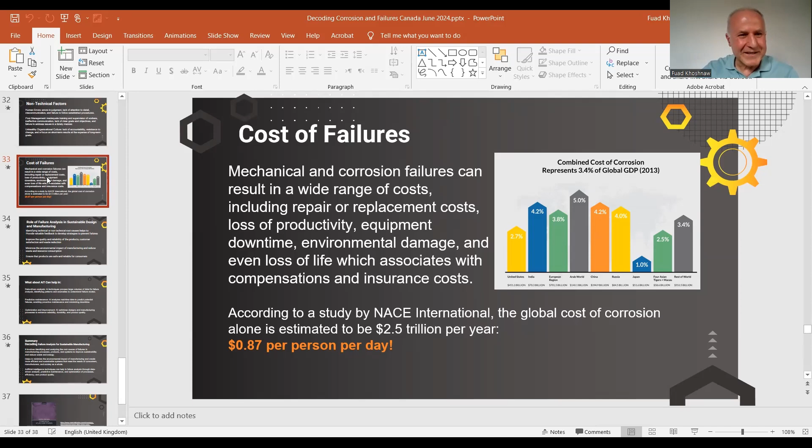Something else we need to remember: every one of us over the world is paying $0.87 per day because of corrosion problems. So it's very much needed to be avoided.